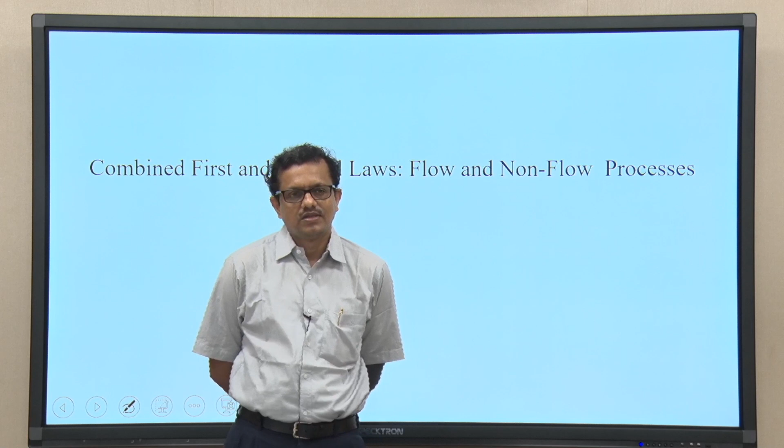You know that in the last class we discussed the mathematical formulation of the combined first and second laws. We also could derive the expression obtained by making use of the second law and the property relations. And we also discussed one particular process, that is the reversible constant volume process.

So, just for brief recapitulation, if we write this as the combined first and second laws. So basically we are trying to again write the mathematical formulation of the combined first and second laws essentially for a system, and that system is a control mass system.

So, if the system is a control mass system, and assuming that the processes occurring within the system are reversible processes, we could write the first law, del q equal to du plus delta w, and from the second law we could write delta q by T via reversible path. In fact, so long as we are using this equality sign, it is valid for reversible processes.

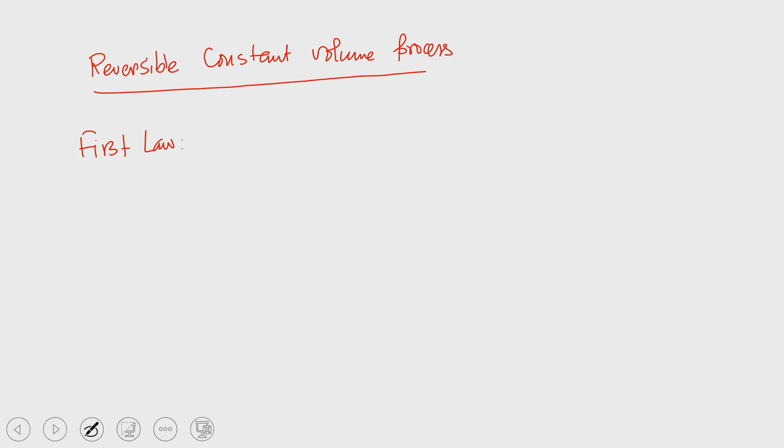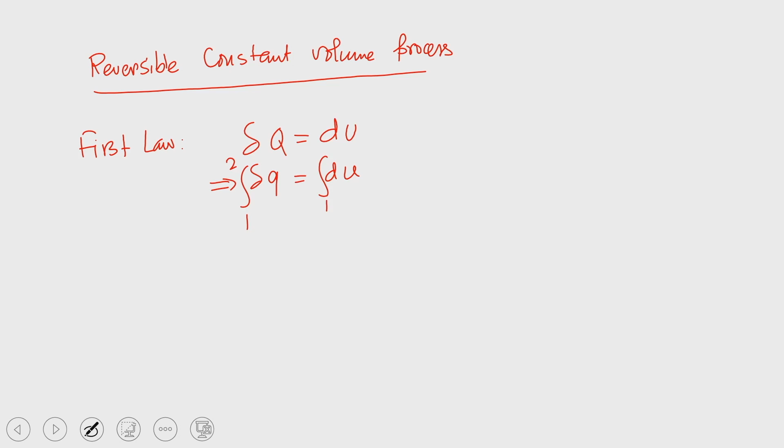So, that is a reversible constant volume process. Okay. So, the first law you know that we can write del q equal to du. In the specific form we can write del q equal to du. If we try to integrate this equation from 1 to 2, because this is an exact differential, we can write u 2 minus u 1.

So, the amount of heat exchange because of the change of state from state 1 to state 2 performed by the system is nothing but the change in internal energies. So basically, for a constant volume process, the work done is 0. And what about the second law? Second law, that is a reversible process. So, basically we do not consider this inequality sign. So, that is del q.

So, this is basically again delta W plus du. If we use the first law, this fellow is equal to 0 for this particular case, and if we write the property relation TdS equal to du plus PdV, but this PdV is equal to 0, since it is a constant volume process. So, this fellow again is equal to 0. So, this is the property relation, and what we can write is this equation.

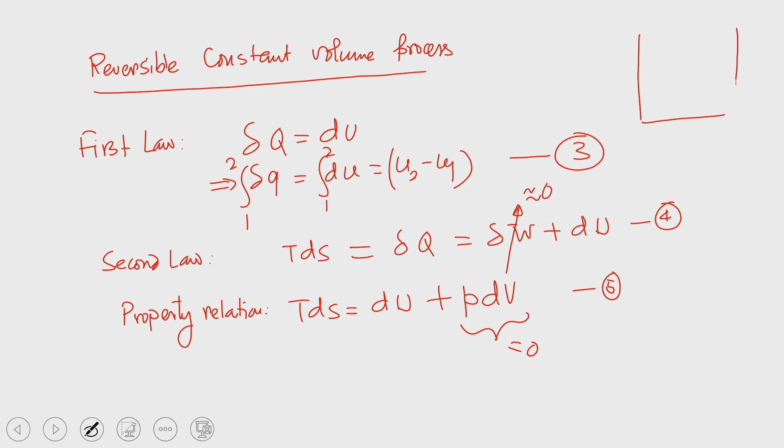Typical example - can you tell me what is the example of this constant volume process? You have studied this in thermodynamics. Say if you have a container, and this container has two stops, and on the top there is a piston. So the piston is at rest on the stops initially, and this container has one pure substance, say water.

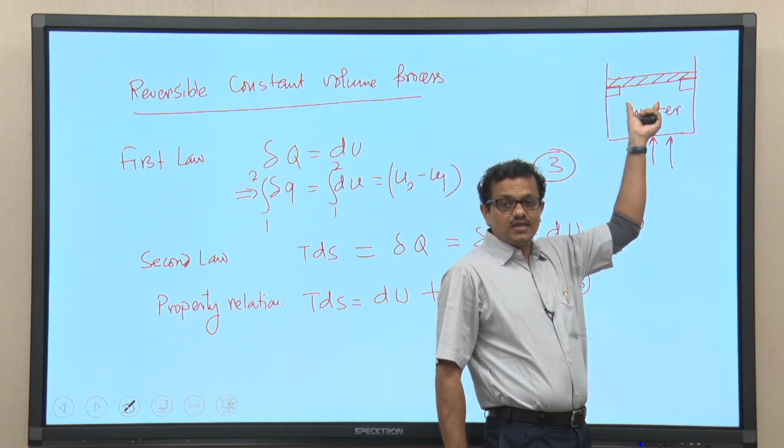If we keep supplying heat from the bottom of the container, the piston will not start moving towards the top until and unless the internal pressure overcomes the pressure due to the atmospheric pressure plus the weight of the piston. So basically the atmospheric pressure is acting - force due to atmospheric pressure plus the weight. So these two should be balanced by the internal pressure.

If we further supply heat and the internal pressure increases further, the piston will start moving upward. So basically until that moment this is a constant volume process, because the volume of water remains constant. Until and unless the piston is moving towards the top, the volume of the pure substance, that is water, will remain constant. So that is a constant volume process.

Okay, so today again I just wanted to recap this. So next we will be discussing about reversible constant pressure process. So this is reversible constant pressure process.

Our objective is to frame the mathematical equation of the combined first and second laws along with the property relation. Why are we doing so? As we discussed in the last class, our objective is to find out the efficiency of a system in which there are different processes. So there could be several processes - maybe one process is a reversible constant pressure process. If we know, first of all we need to identify what properties we know at the initial and final states, and which property we are really looking for.

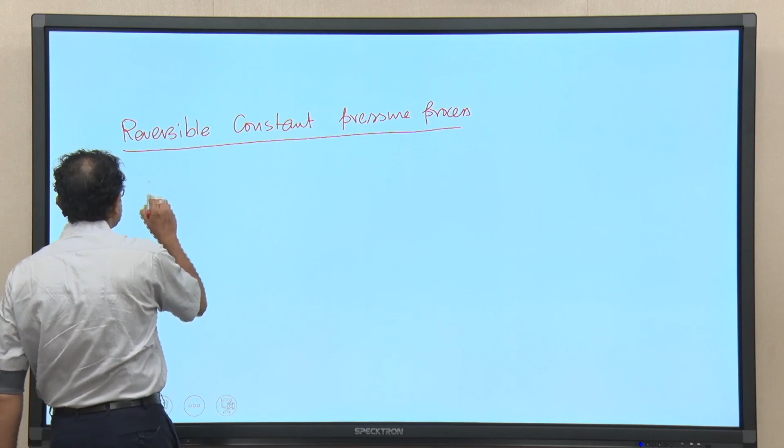So basically if such a process is there in the system, that is reversible constant pressure process, then what would be the first law, second law, combined first and second law, and the property relation? So you know the first law, constant pressure process - first law would be del Q equal to dU plus del W, right. So what is the work done? That is very important - pressure is constant. Again we are assuming that the system contains a substance which is simple compressible pure substance, right.

So the changes in pressure, volume, temperature are considered. Other effects arising out of electrical and magnetic forces are not considered. So basically delta W equals P dV, and you know that P is constant. So if we try to integrate it to obtain the work done, we really do not know whether pressure and volume, the change in pressure and volume, follows the path. So basically the system is changing its state from 1 to 2 following a particular path. If we really do not know - because delta W is a path function - it is like this.

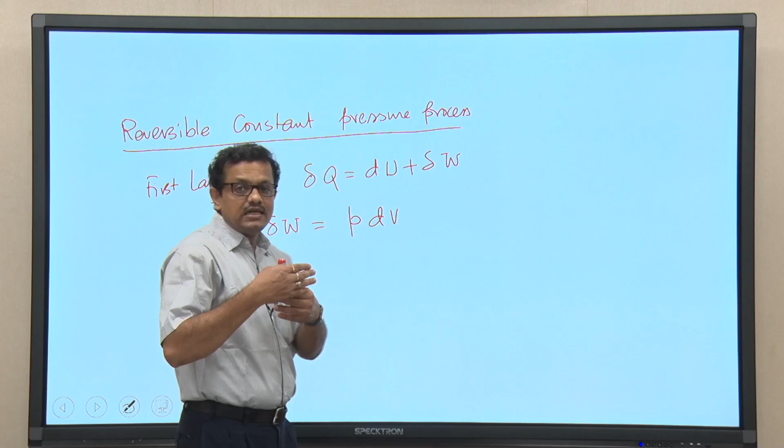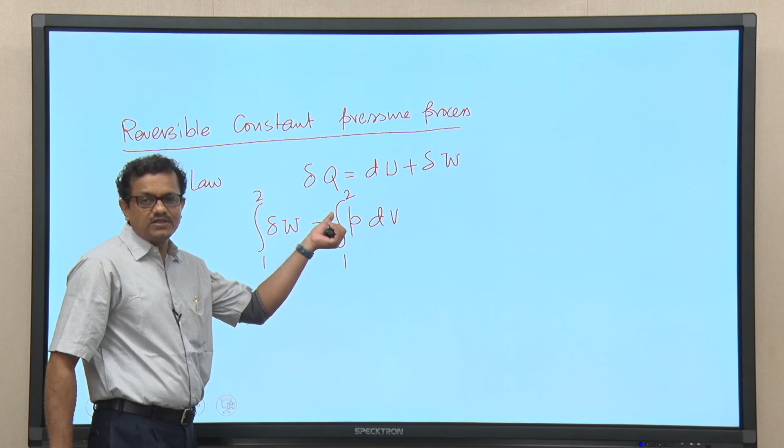So basically we need to know the relationship of pressure and volume, how it changes following that particular path. So this is integral from 1 to 2 of P dV. You know that since this is a constant pressure process, pressure does not change in the process, so you can take it out. So basically it is P dV, or you can take P outside - so that gives P times V2 minus V1. So this is the first law.

What about second law? Second law is for a reversible process. So T dS equal to del Q, right - so this is the second law. Now this is very important - because we are not using the inequality sign, the process is reversible, and what we can do is we can write that dS equal to...

...del Q by T. We can write the specific form del Q by T. So if we integrate from 1 to 2, we can write S2 minus S1, the change in entropy, is nothing but the integral from 1 to 2 of del Q by T. So if we erase it, this is small q.

Okay, this is the equation. Now I have something to say here. You know this is PdV, right. So this equation we can write like this: del Q equal to du plus delta w, small w, and du plus PdV. It should be small volume because we are trying to write all quantities in specific form. So this is PdV. Since pressure is constant, we can write del Q equal to d of u plus Pv, because pressure is constant. So this is as good as du plus Pdv.

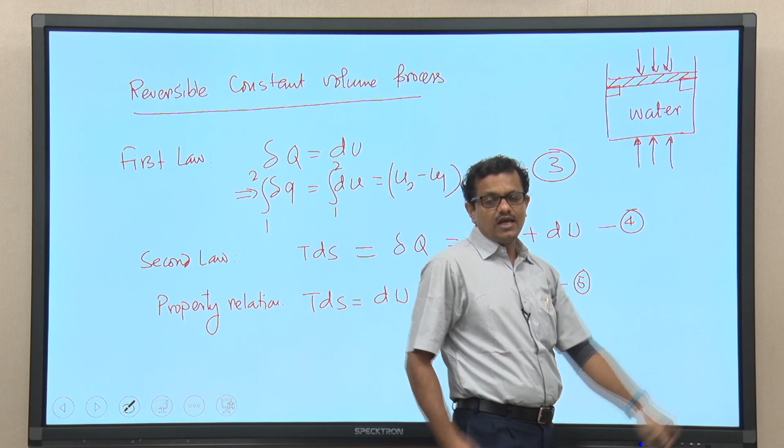Now I would like to discuss all this from the graphical representation along with one practical example. What would be the practical example? You are having water in a container, and you are supplying heat. Time will come when internal pressure will overcome the pressure due to atmospheric pressure plus weight of the piston, and the piston will slowly move up, and that process is known as constant pressure process.

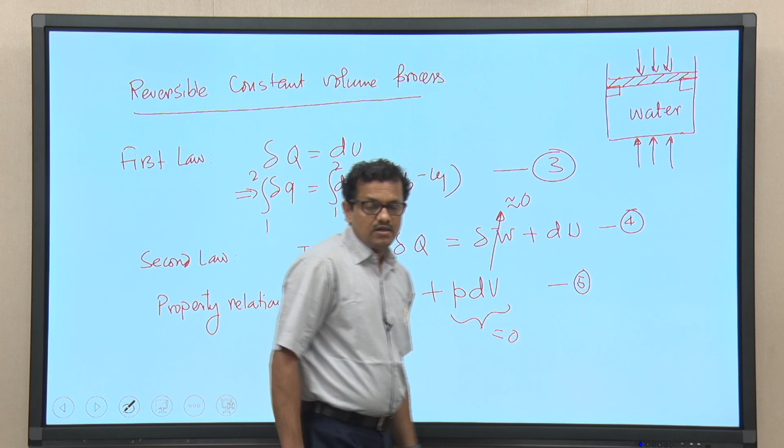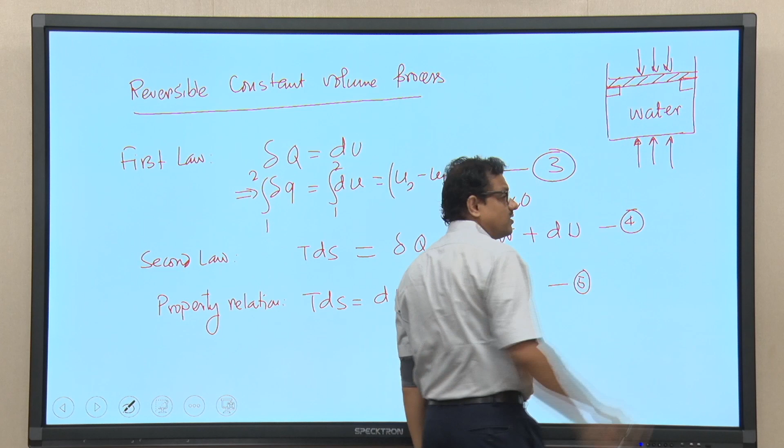Try to understand: until there is a moment when the piston starts moving upward, the process is a constant volume process. When the piston is moving towards the top, following this force balance, the internal pressure is greater than the atmospheric pressure acting on top of the piston plus the weight of the piston.

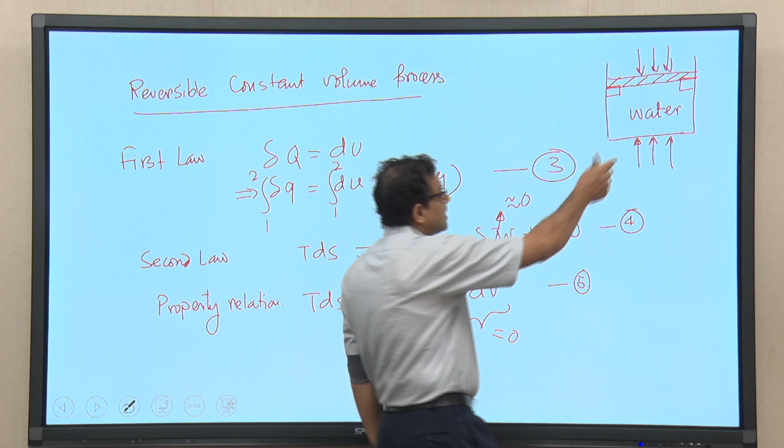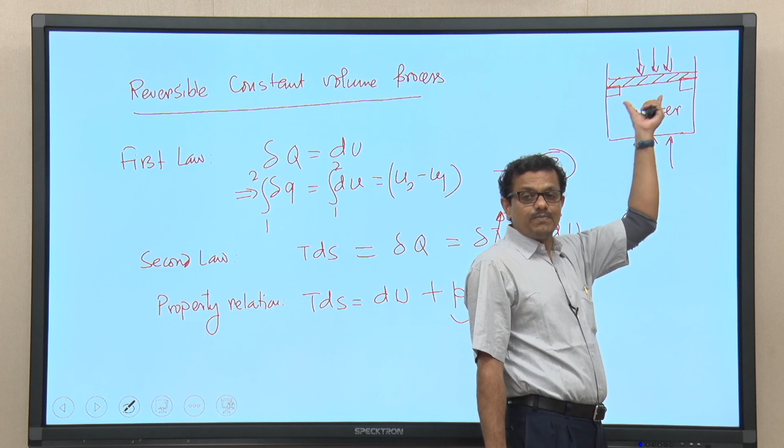If we continue supplying heat to the system, the piston will slowly move up, and we allow the supply of heat to continue. As the piston moves up, the volume of water will be converted to steam depending on the temperature, so the volume of the substance keeps increasing. It is no longer a constant volume process, rather a constant pressure process, because the process is executed in presence of the atmospheric pressure.

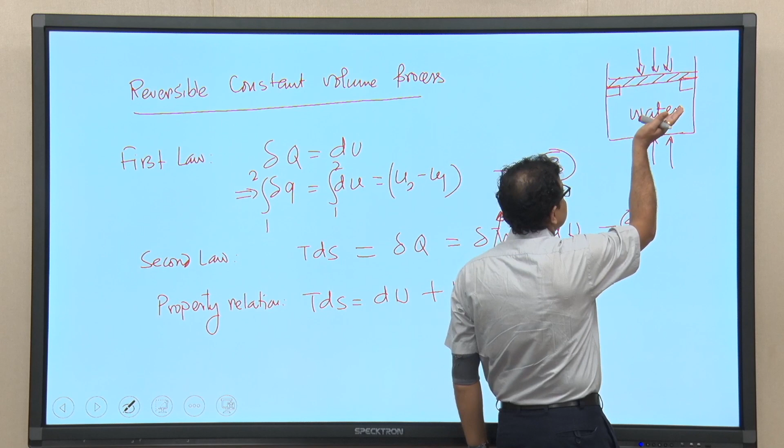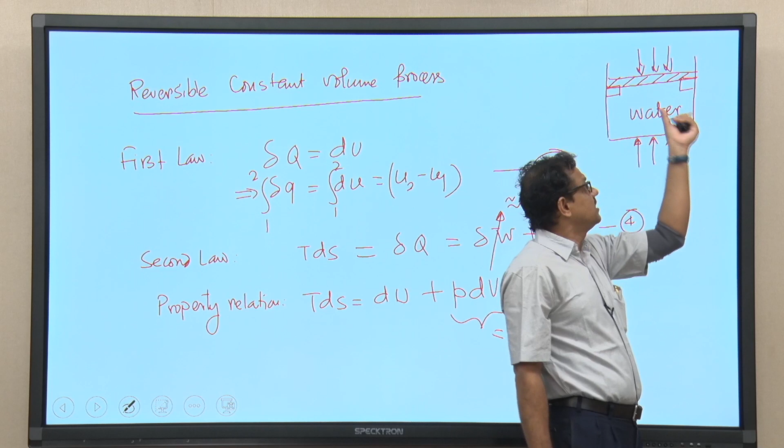So upon receiving heat, the volume of the substance increases, the piston moves up, but against the atmospheric pressure. So this is a constant pressure process, and the supply of heat is continued until the volume becomes double. Initially the volume is this, and if the volume doubles, this is an example of a reversible constant pressure process.

Why reversible? Because the movement of the piston is very slow, quasi-statically. The work done on the system boundary here is PdV type of work. The movement of piston is quasi-static, so the deviation from equilibrium is almost nil. In that case, we can express the process by a reversible constant pressure process, for which we have derived the expression.

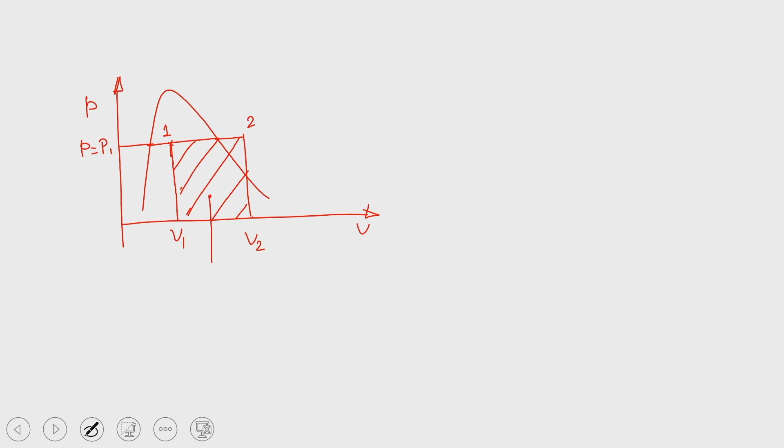Right, so that is work done during the process.

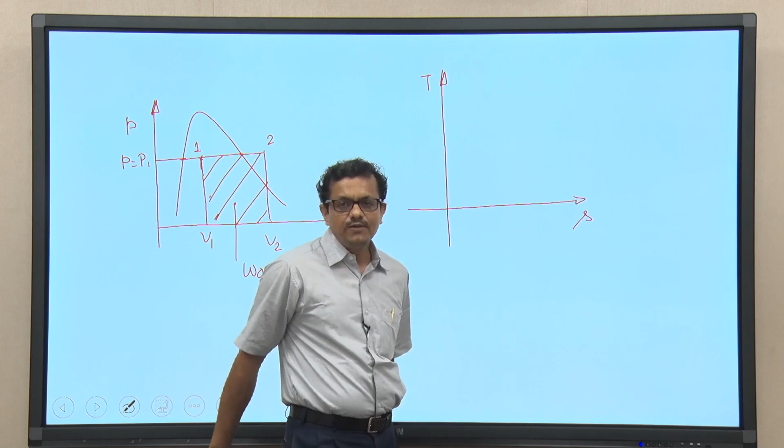Similarly, if we try to represent the process in the TS plane - why are we trying to map the process in TS plane - you have studied in thermodynamics that the area under this process line in the PV plane will give you the work done during the process. Similarly, if we can map the process in the TS plane, the area under the process line will give us the quantification of the heat which is added to the system.

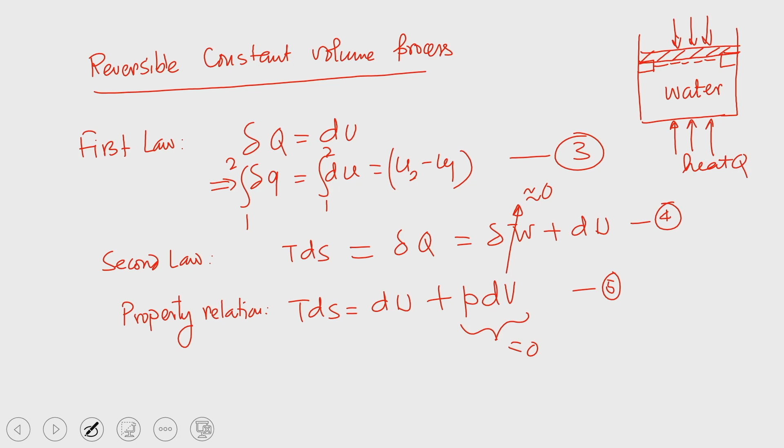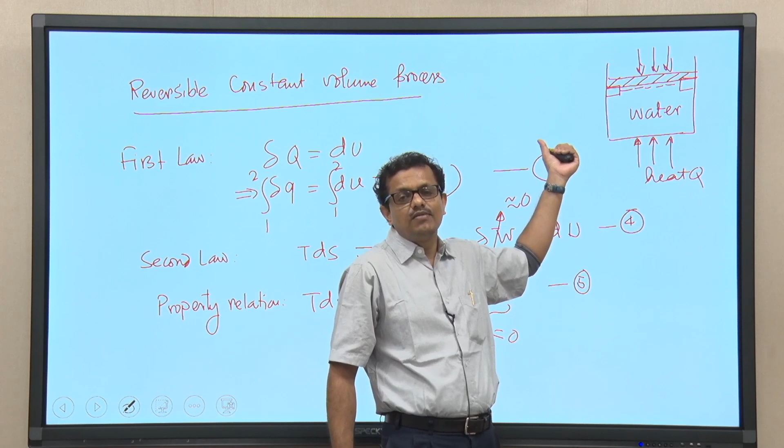Again I am coming back to the previous slide. Upon receiving heat, so this is heat - upon receiving heat, the substance phase will change. Now, to have an estimate about the heat which is being added to the system for this particular case, that until volume of the substance is doubled, we can map the process in the TS plane.

So, you know that this is the TS plane. So, pressure is remaining constant - constant pressure line - but temperature changes. You know that definitely temperature has to be changed, volume is also getting changed, pressure is remaining constant, so temperature is getting changed. So, this is T1.

So long as the process line is within this vapor dome, pressure and temperature are correlated - if pressure is remaining constant, temperature also will remain constant. So, this is T1. Maybe the heating is continued until the temperature becomes T2, so this T2 is greater than T1. So, say this is point 2 and this is point 1.

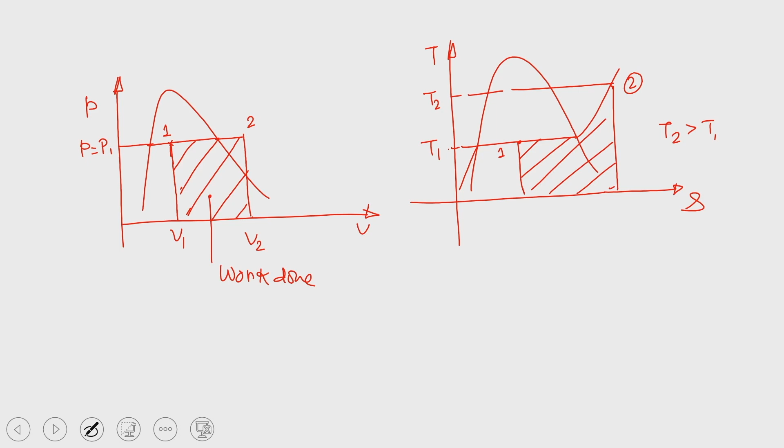So, you know that if we try to... so, this is heat transfer. This is the amount of heat which is added to the system. So, you know that this is the line.

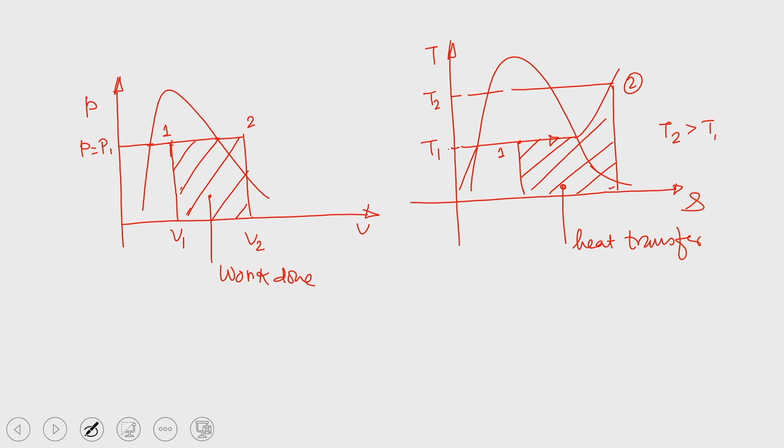So, we have discussed the second equation - we have discussed about the constant volume process, we have discussed about the constant pressure process, and all these processes are reversible. Mind it, in reality it is very difficult to achieve a process that is reversible. So, all processes are irreversible, but why are we doing so? Essentially, we are trying to discuss reversible processes towards the quantification of the work which is being added to the system, the heat which is being added to the system, and the work which is done by the system.

So, next we will discuss reversible isothermal process. So, the combined first and second law we need to write for the reversible isothermal process. You can understand that reversible isothermal process means temperature is remaining constant.

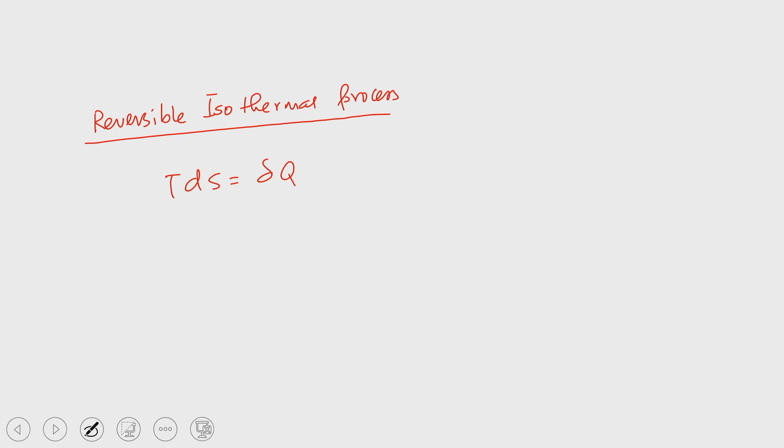So, you know that TdS equal to delta Q equal to dU. We are writing it in the non-specific form, so we are writing dU plus delta W. So, this is what we can write.

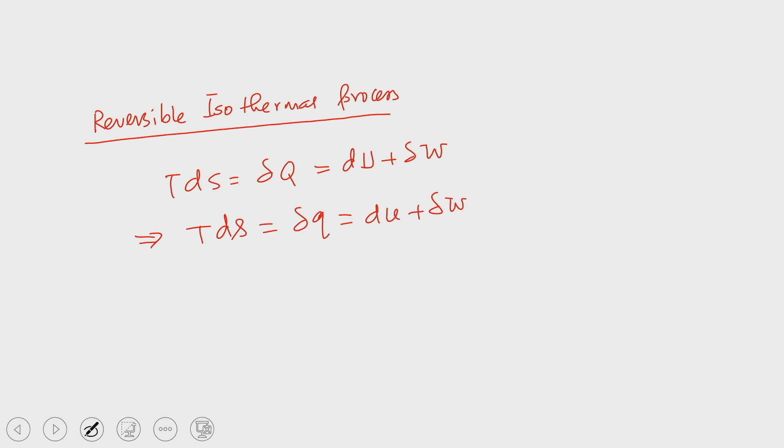Now, temperature is remaining constant because the process is reversible isothermal. So, we can write, if we integrate it - TdS equal to delta Q equal to dU plus delta W. So, if we integrate, say the system is changing its state from 1 to 2 for this particular process, we can write T into (S2 minus S1) equal to the integral from 1 to 2 of delta Q, equal to (U2 minus U1) plus the integral from 1 to 2 of delta W.

So, this is not capital W, this is small w, now specific. So, this is the expression.

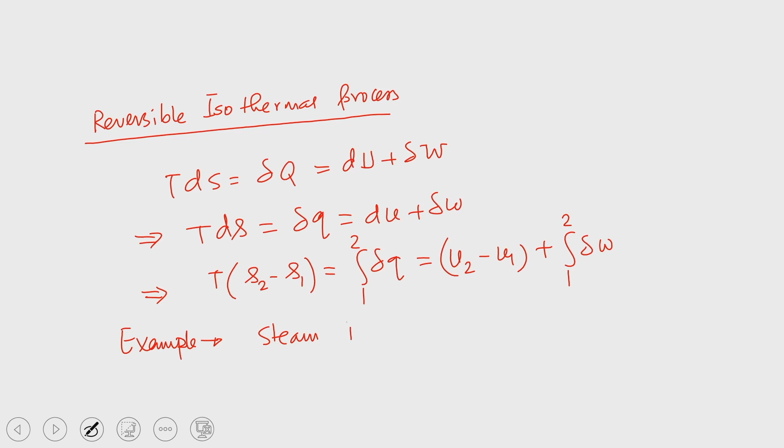So again we need to map the processes in the Ts and PV plane. What could be the example? Example: say again we can take the same example of steam. If we compress the steam reversibly and isothermally - steam water mixture, again a pure substance, is compressed reversibly and isothermally to a particular specific volume.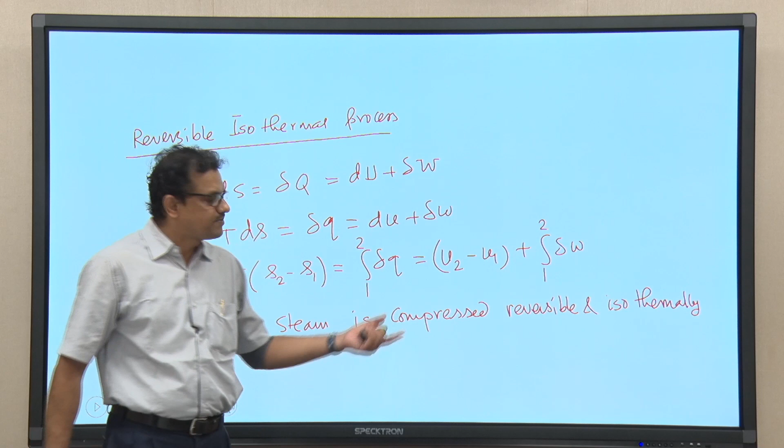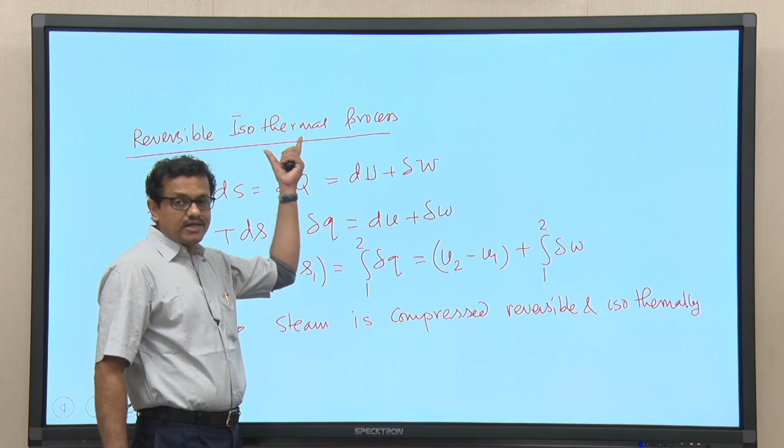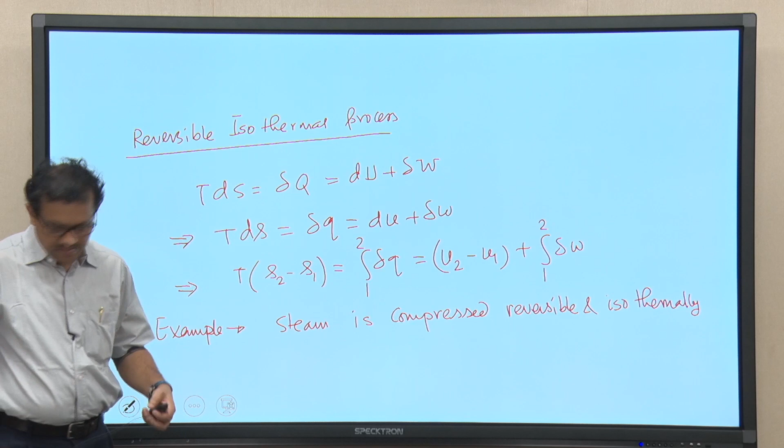So, what is the meaning of this particular process? We would like to compress or reduce the specific volume. So if you would like to reduce the specific volume, we need this particular process - reversible isothermal process. I mean we are compressing steam reversibly and isothermally. So, can we represent these two processes in the TS and PV plane?

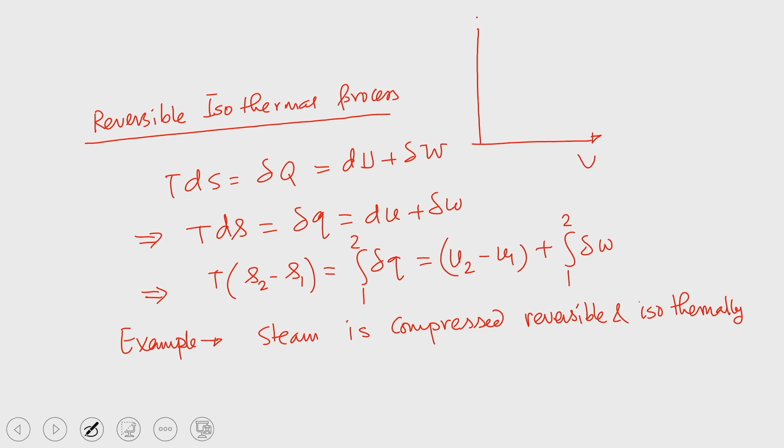So, I am trying to write here - this is V and this is P. Isothermally, so basically the constant temperature line.

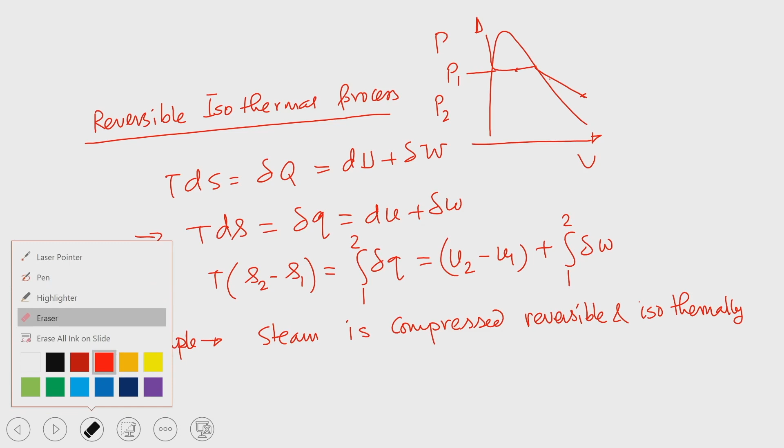Okay. So, now this is the work done. So, this is T equal to T1. Temperature is constant. So, the process is an isothermal process, but we are compressing. Say we are compressing, so this is the work done, right. So, this is very important: if you would like to compress, pressure will increase.

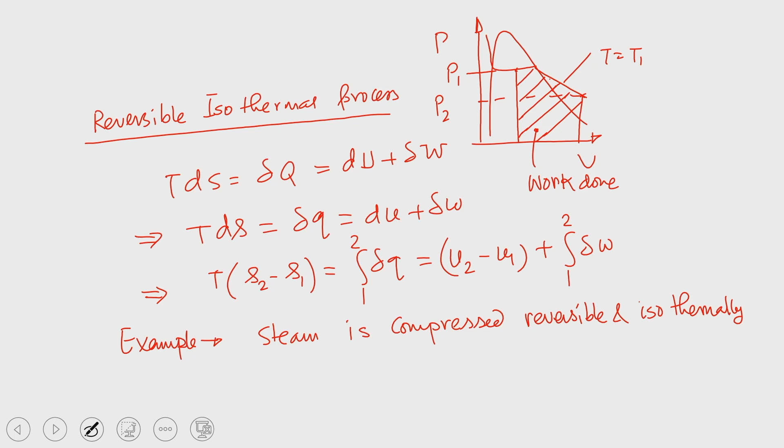So, suppose this is point 1, this is point 2, and the process is along the constant temperature line. So, this is the process, right, 1 to 2. So, this is the work done. So, basically you need to increase the pressure, you have to compress it, pressure will increase, and our objective is to reduce the specific volume. You can see that the volume is getting reduced from 1 to 2.

So, the objective is: steam is compressed reversibly and isothermally to reduce the specific volume. So, this is specific volume. So, this is the work done. So, work done needed for this particular process is nothing but the area under this process line.

If you would like to have the corresponding TS diagram, so this is T, this is S, right. So, you can understand temperature is remaining constant. So, say this is a constant pressure line, this is another constant pressure line, right. So, the objective is to increase the pressure or reduce the specific volume, but temperature is remaining constant.

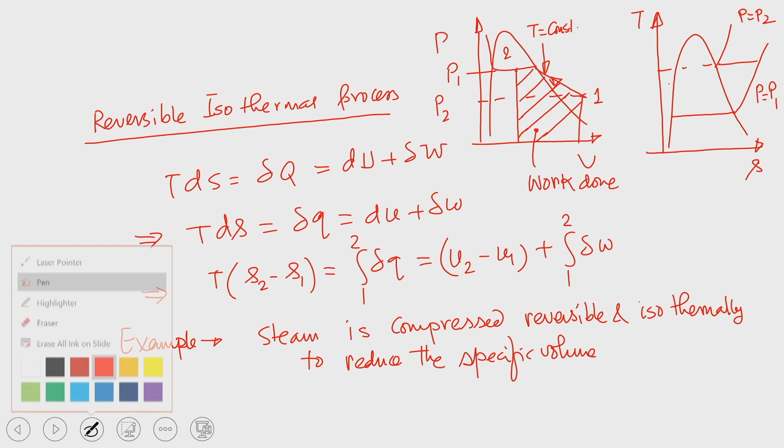If that is the constant temperature line, then this is another pressure line. So, this is P equal to P1 and this is P equal to P2. So again I have to erase it because of the space issue. Okay. This is S. So, suppose it is coming up to this point, right. So, this is basically the heat transfer.

So, try to understand this is point 1 and this is point 2. Constant temperature, because point 1 and point 2 lie on the same temperature line, an isothermal process, but you can reduce the specific volume and pressure is increasing from P equal to P1 to P equal to P2. So, P equal to P1 and P equal to P2 are the constant pressure lines, right.

So, this is a constant pressure line, P equal to P1. So, these two are the constant pressure lines, while steam is compressed reversibly and isothermally; temperature is remaining constant, specific volume drops. So, this is the amount of heat transfer.

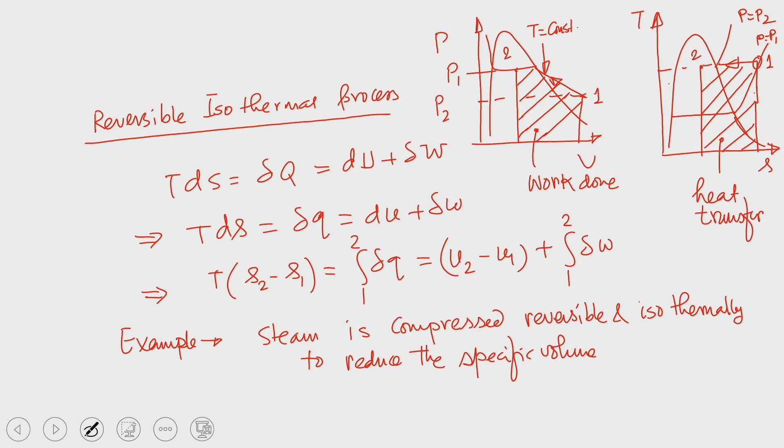Okay. So, what we can see from this is that if we can identify the process, we can map the process in the PV and TS planes. From there we can quantify, just by knowing the process line, the work being done by the system or heat which is added to the system. Okay. So, this is the isothermal process.

Next one is the reversible adiabatic process. You can understand the name is implying that the process is reversible and adiabatic. So, for the reversible adiabatic process, you have seen the expansion of steam in the turbine. So, an example is expansion of steam in a steam turbine.

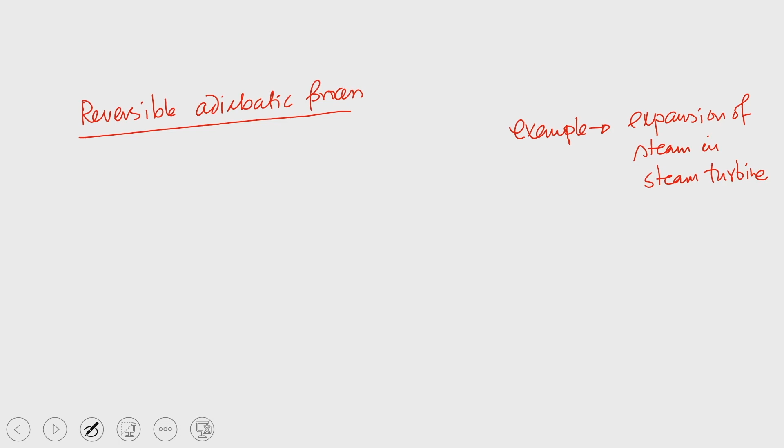Just for the sake of completeness, what is done in a turbine? In a turbine, steam is allowed to flow through the turbine. Steam is produced in the boiler and taken to the turbine, not directly, but steam is allowed to pass through flow nozzles and then taken to the turbine. Now, when steam is passing through the turbine, it does work on the rotating part of the turbine wheel, that is the runner.

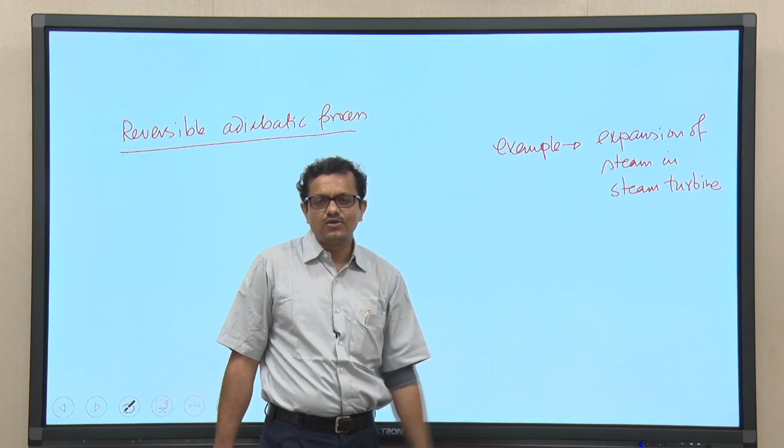So, we consider that while steam is passing through the turbine, the process would be reversible and adiabatic. At the inlet to the turbine, steam has high enthalpy, and that enthalpy will drop during its flow through the turbine, and because of this enthalpy drop we get work output. Now, if heat is transferred from the system to the surroundings during the flow, the work output from the turbine will be reduced. That will definitely impact the overall efficiency of the cycle or plant. So, this is an example.

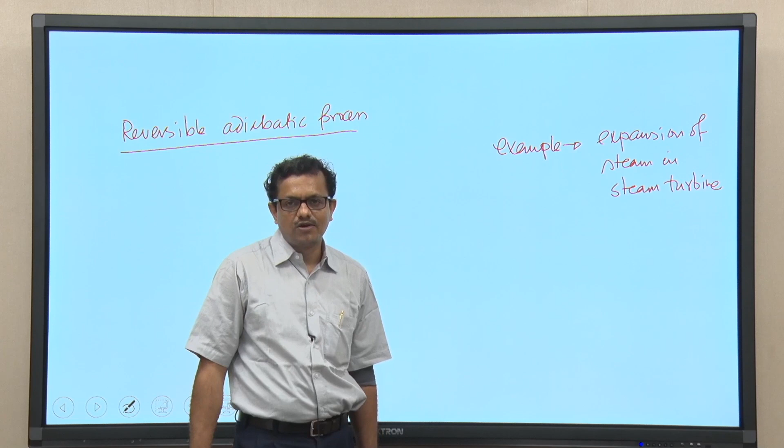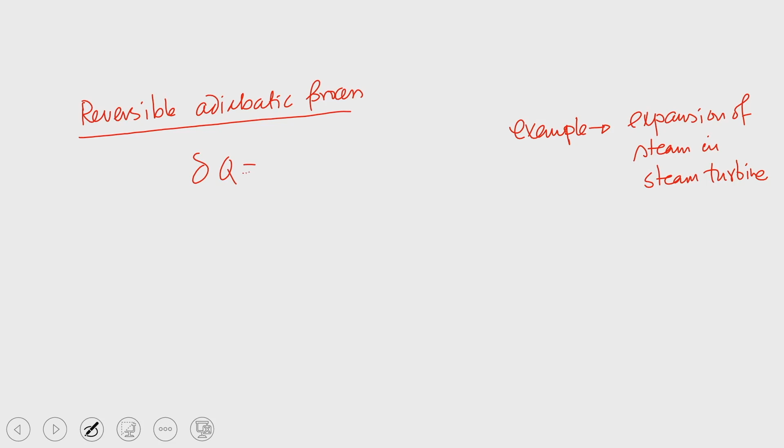So, reversible adiabatic process. If the process is reversible adiabatic, then delta Q equal to 0 equal to dU plus delta W, right.

So, this is reversible adiabatic process. What we can see is that du equals minus delta w. So, this is the example. In a way we can write the work done: from 1 to 2, delta small w equals minus integral from 1 to 2 of du, so basically u1 minus u2. So, this is basically u1 minus u2.

So, try to understand that the work that will be done by the steam on the rotating part of the turbine is nothing but the change in internal energy, u1 minus u2. So, that is what we can see from the first law, and from the second law we write that ds equals delta Q by T equals 0, which implies that S2 equals S1.

So, this is very important. You have frequently studied that a reversible adiabatic process is an isentropic process. The entropy at the initial state and the entropy at the final state of the process remain the same, that is S2 equals S1. So, this is a constant entropy process. So, if the process is reversible adiabatic, S2 equals S1.

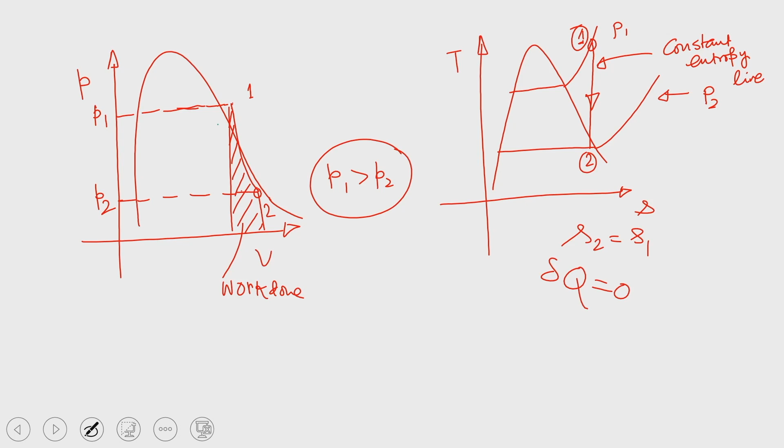So, this is S2 equals S1 and this is the constant entropy line. So, what is heat transfer? The area under the process line in this particular case is 0, so there is no heat transfer; we can write delta Q equals 0. So, this is a reversible adiabatic process. We have discussed 4 different processes: reversible constant volume, reversible constant pressure, reversible isothermal and reversible adiabatic, and taken 4 examples to illustrate them.

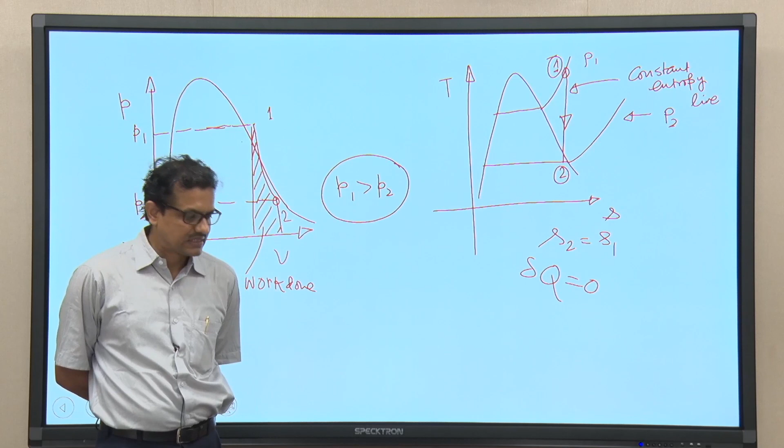So, till now we have discussed all these processes considering the combined first and second laws and also the property relation. So, today we will discuss one important thing, that is work done, which is very important. We have seen that either energy is transferred from the system by work or energy is added to the system by heat.

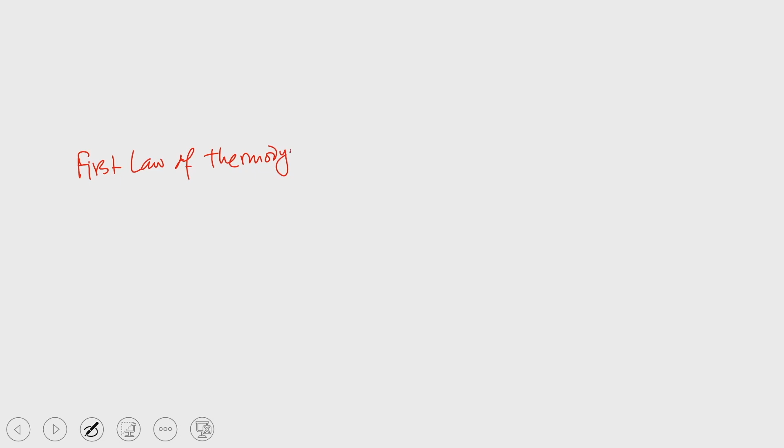If the processes are flow processes and we try to find the energy added to the system by heat or the energy taken away from the system by work, then we can write the first law of thermodynamics across the control volume. So, the first law of thermodynamics across the CV.

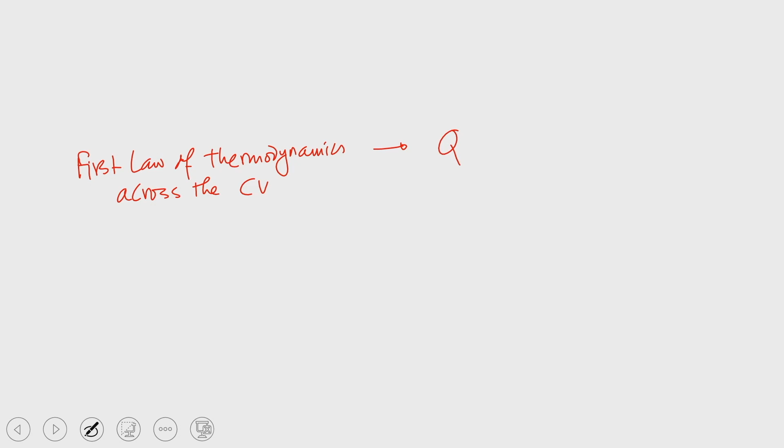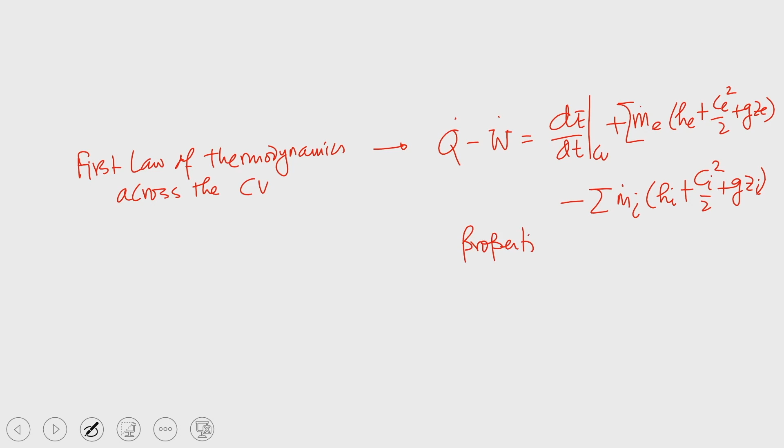If we recall, we have discussed this part, and this can be written as Q dot minus W dot equals dE/dt of CV plus m dot e times (h e plus C e squared by 2 plus g z e) minus m dot i times (h i plus C i squared by 2 plus g z i). This equation is obtained under one important assumption, that the properties are uniform over each flow section.

So, this is an assumption, and it is because of this we could take h e plus C squared by 2 plus g z e outside the integral when it is obtained from the Reynolds transport theorem. So, this equation is the rate equation.

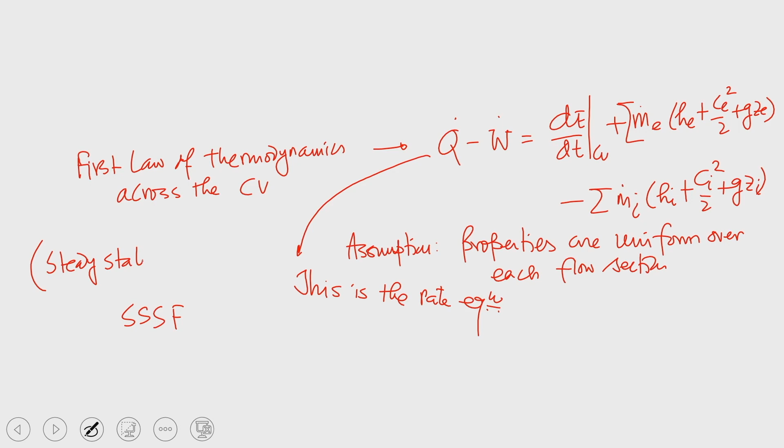Right. We also can write it not in the rate form. So, why I am writing this: we will be discussing what happens if we apply the steady state steady flow processes. So, for the steady state steady flow processes, basically if I take the first letters, SSSF, then we will be getting this for the steady state steady flow processes, and if we do not write this in the rate form, that is, if we integrate it over time, over the cycle, then we can write

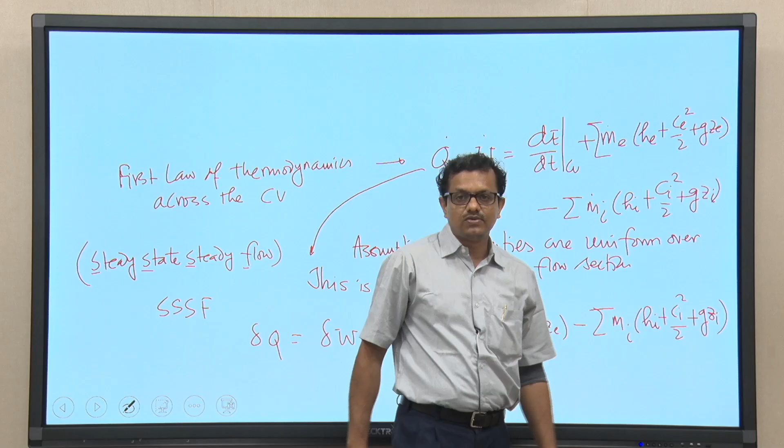δQ equal to δW plus m_e(h_e plus C_e² by 2 plus g z_e) minus m_i(h_i plus C_i² by 2 plus g z_i). So, this is the equation if we integrate it over time, over the cycle. Why? For the steady state steady flow processes, this d/dt is equal to 0. The state is steady and also the flow is steady. So, properties do not change with time. So, density does not change with time.

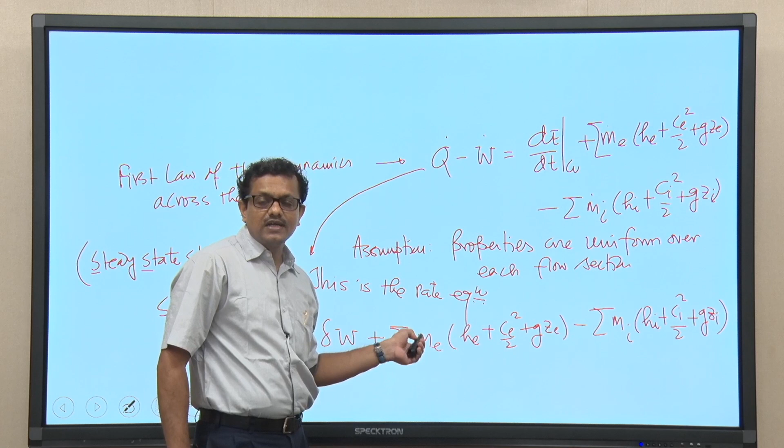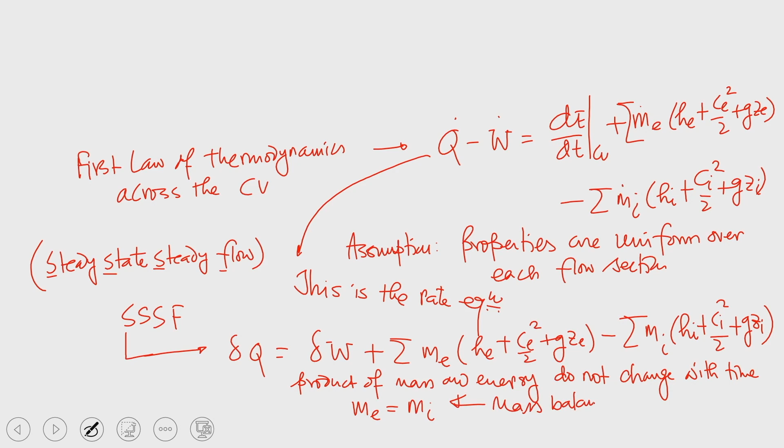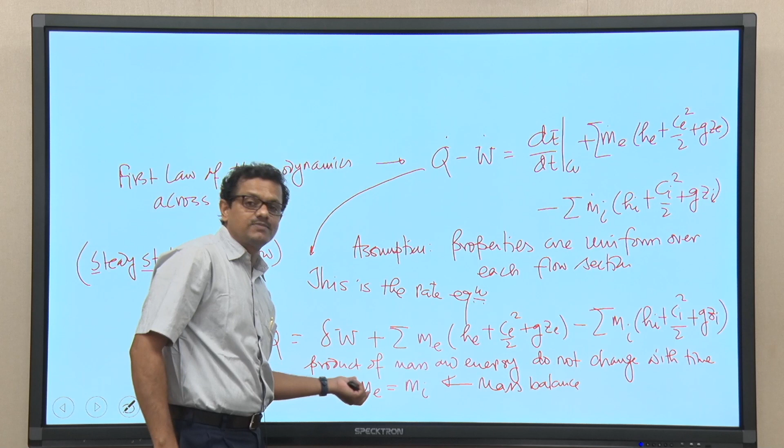So, basically we could write this equation only for the case that the product of mass and energy does not change with time. This is what steady state steady flow processes are valid for: the product of mass and energy does not change with time, right. So, together with this energy balance, the steady state steady flow energy balance, we also can write the mass balance, that is m_e equal to m_i. I told you that energy balance is not a balance in an isolated manner; rather, energy balance has to be coupled with the mass balance, and that is why you could write this. So, m_i equal to m_e.

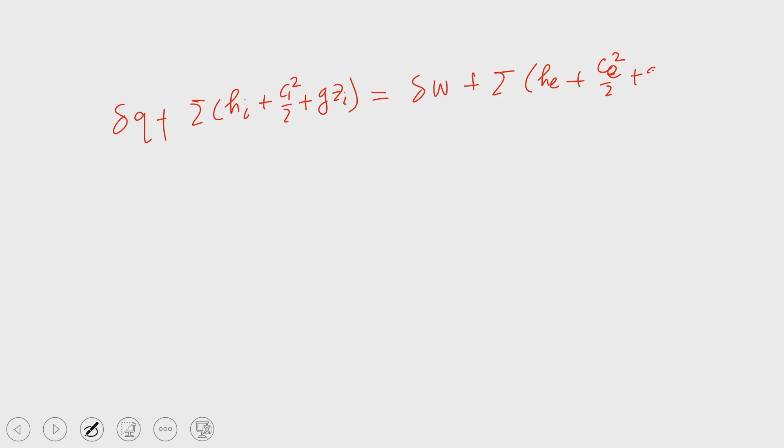We also can write this equation in another form, that is δQ plus Σ m_i(h_i plus C_i² by 2 plus g z_i) equal to δW plus Σ m_e(h_e plus C_e² by 2 plus g z_e). Okay. So, this is the important equation. I am keeping this equation in this box. We will be using this equation frequently when we try to find out the heat and work interaction of a process occurring in a particular device, a particular system.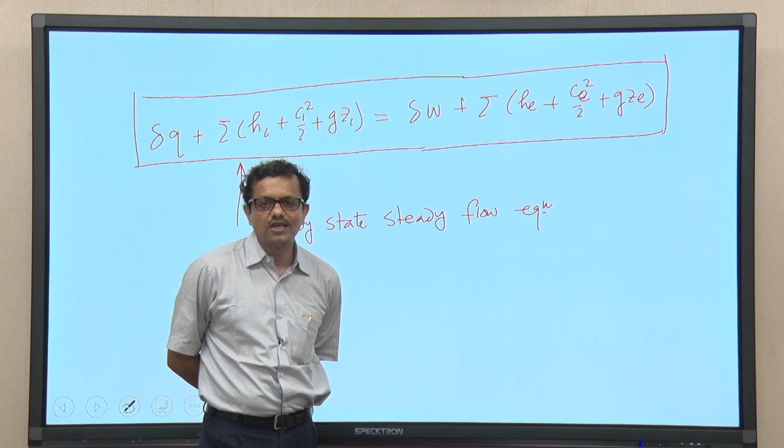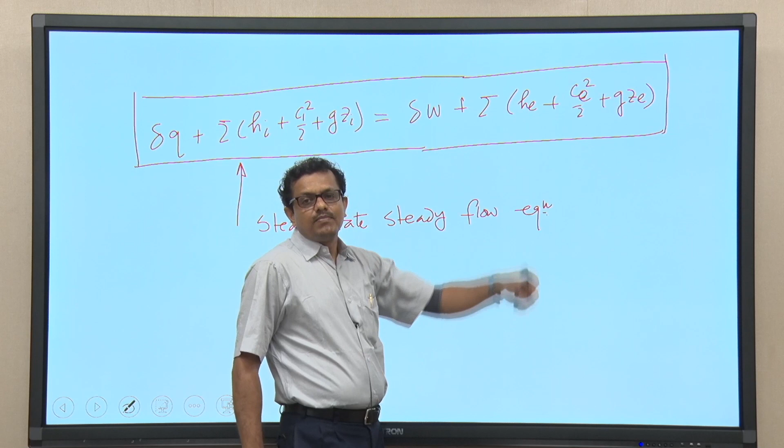So, this is the steady state steady flow equation. So, why am I writing it? Because if you would like to apply the first law, or also the combined first and second law, to flow processes, this is the equation we shall be using frequently. I have taken summation keeping in mind that there might be multiple exits and multiple inlets. So, here e stands for exit, i for inlet. Okay. So, this is a very important equation we shall be using.

Since we will be using it frequently, I was thinking to derive this equation, not a full derivation, but from the derivation we have done in one of the previous classes, I have recalled that and written it in this form. So, now we can identify, when a particular system is considered, whether the process occurring in the system is a heat interacting process or a work interacting process. Suppose the process is not a heat interacting process. So, this δQ term will be equal to 0. In that case we can easily quantify the work done by the process as nothing but this change. Okay.

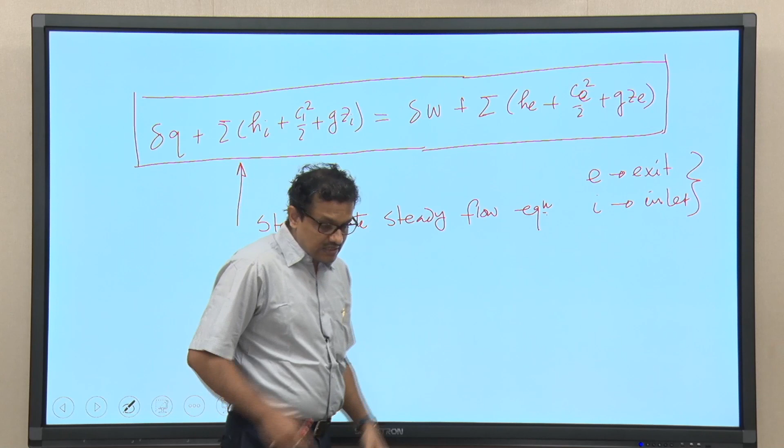Maybe we have to take another important assumption, that the changes in kinetic and potential energies are negligibly small, and then simply the work done by the process is nothing but the change in enthalpy. So, this particular equation will be very useful when we try to find out the energy interaction in a process, whether it is by heat or work, when there is a flow. Using this equation and considering the second law of thermodynamics, we shall try to find out work done in reversible adiabatic and reversible isothermal processes.

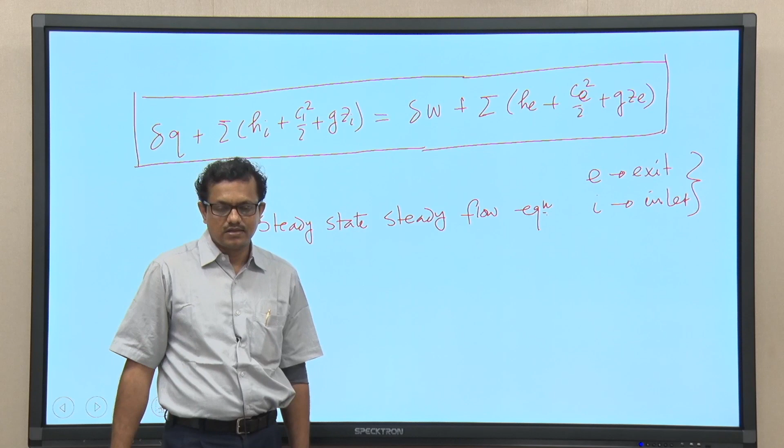Work done in reversible adiabatic and reversible isothermal processes is also important; we shall try to derive an important equation, and we shall compare the work done by a reversible isothermal process with the work done in a reversible adiabatic process. This particular exercise we shall discuss in the next class.